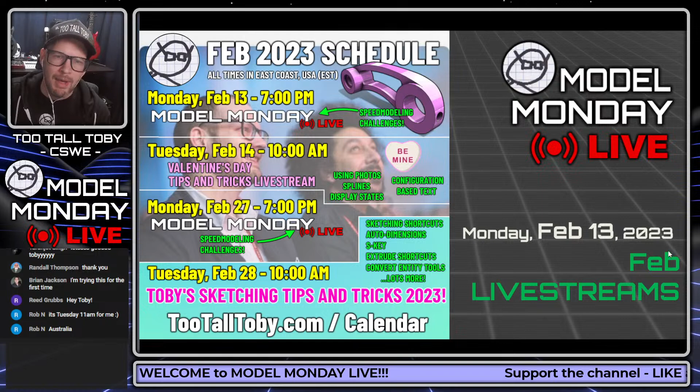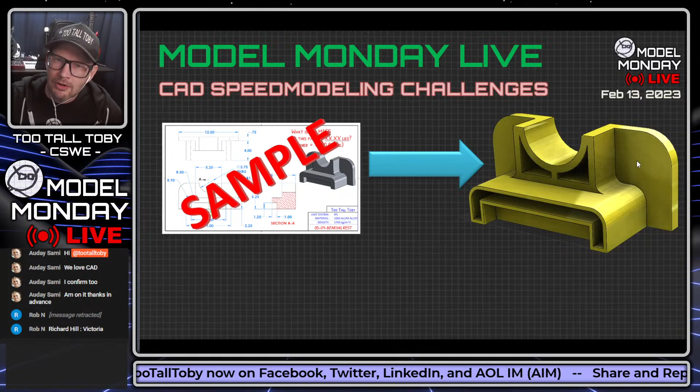I'm going to show you a 2D print. You're going to turn that into a 3D model, calculate the mass of that model, and enter that mass directly into the YouTube chat. The first person to enter the correct mass will win, but I'm not going to tell you the answer right away. I'll let everybody have a chance so everyone can compete against one another.

If you submit your answer and then realize it's wrong, that's okay. You can adjust and submit a second answer, a third answer, as many as you want during Model Monday Live. You can use any CAD package, but you need to be able to input the density.

I'll show you those material densities in just a moment, and of course output the mass. Make sure you use the specified precision, which is on the print. The first correct answer in the chat will be declared the winner.

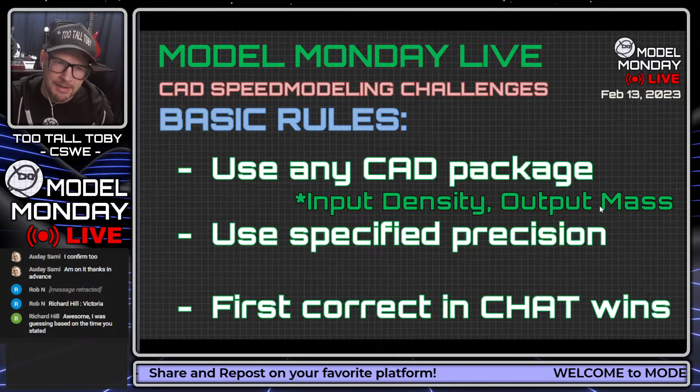Tonight, all the answers are in whole numbers, so you don't have to worry too much about the precision, that middle item there. But sometimes you do - sometimes I ask for it in 2 or 3 place precision, and that becomes more important.

These are the units that we use, so I'm just going to leave this up on the screen for a moment. Please take a screen capture of this so you understand what units you'll be working with. And really, I think what's more important than the units is the material density.

Take a look at the bottom there. If you're using a different CAD system than what I used when I created these things, your material density might be a little off. You want to make sure you're using the correct material density, otherwise your answer will also be incorrect.

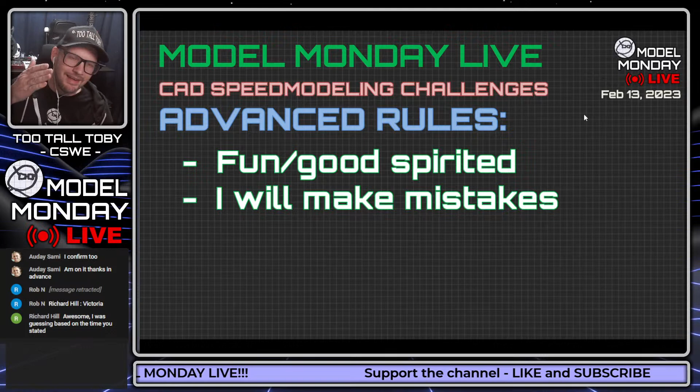The advanced rules are - this is meant to be fun and good-spirited. Occasionally I will make a mistake. I remember a couple weeks ago I left off a diameter on the print. I try not to do that, but occasionally it happens, and when it does we'll just adjust on the fly. The Ivan exploit is permitted - it's discouraged to a degree, but sometimes I make sheet metal parts and can't really get around it, so the Ivan exploit is permitted. Permitted, but discouraged, let's put it that way.

So what's going to happen now is I'm going to show you this 2D print full screen, and you are going to take a screen capture of this, Windows snipping tool, whatever. Once you take the screen capture, you can move that over onto your second monitor and begin modeling in CAD.

If you don't have a second monitor, once I show the 2D print you could just pause the video, like if you're watching from your phone. You can pause the video and keep working from your phone, or take a screen capture and maximize it. It's really best if you have a second monitor, but if you only have one, you can maybe tile your windows. After I show the print for a couple minutes, I'm going to move on and talk about some other stuff, so be sure to take a screen capture.

All right, this challenge is going to go live in 3, 2, 1, go. What is the mass of this part in grams, with a tolerance of plus or minus 1 gram? The material here is plain carbon steel, which has a density of 7,800 kilograms per cubic meter. The units are in millimeters.

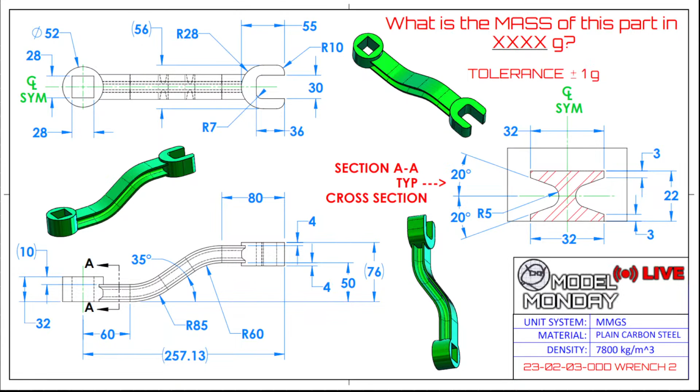It's a good song. Good song to get started with modeling, for sure. All righty, let's get back to it here.

So a question came in from Rob: what is the Ivan exploit? The Ivan exploit is basically, like on this print here, you can see this square, my mouse is pointing to it. Let me zoom in on it here. This square is on a face on top, and there's a face on the bottom. These two faces, the top and the bottom, are parallel to one another. In that situation, where the start face and the end face are parallel, the location of that square hole becomes irrelevant relative to the final mass of the component, meaning that square could be anywhere on that face.

Now, with this model, there's not really that much value in knowing that, because that square is centered on that lower face. Although now that I look at it, I realize I didn't actually call that out, that it's centered. I should have added a 14 dimension and a 14 dimension here. So there you go, there's an example of Toby missing a dimension. That does happen sometimes, I do miss a dimension from time to time. But that square is centered on there.

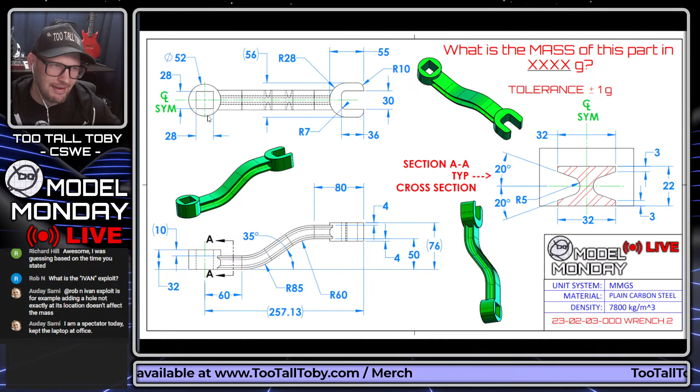Whoopsie! Very first one here for some of our runners. For Brian, sorry Brian, but that should be centered on that lower face. But hey, due to the Ivan exploit, it doesn't even matter if it is centered. So there you go, it all works out in the end. But that's the idea of the Ivan exploit. Sometimes that can be very valuable as far as time goes. But it's just something I can't really prevent, since I don't get a chance to see your models. Now, there are things I do when creating these models, like making the bottom face slightly angled, so the location of the hole does matter. Those are my efforts to thwart the Ivan exploit.

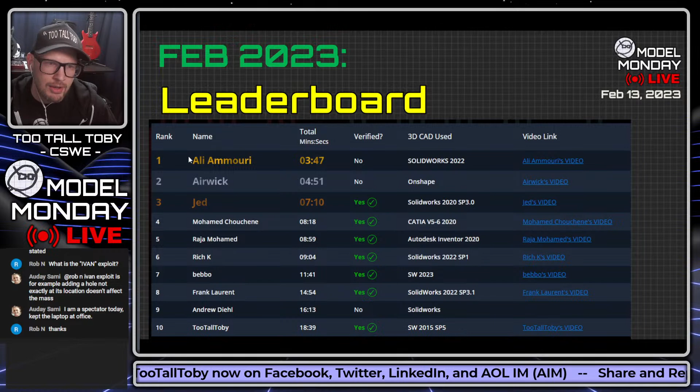So let's talk for a minute about the 2023 leaderboard. This is a really cool thing we started doing here in February. There is a leaderboard at TooTallToby.com/leaderboard, where I've posted 3 models, 3 drawings, like what we're looking at here. I challenge the audience to go through and create those three models, and the audience attempts to do so in the shortest amount of time possible.

Here's what the leaderboard looks like live. So this is the live leaderboard here. You can click on this little picture of me and get the rules explained to you, how to do it. You can click here if you want to see what the 3 drawings look like. And what's really cool is when you go down in here, you can actually click on the video and it takes you to the video of the person running this thing.

So looks like that one was... That Ali ended up having a problem with his first run there. He missed a dimension, and he actually still got the correct mass, but I noticed that he missed the dimension. But let's take a look at this run here. So this run, you can see this is by Airwick.

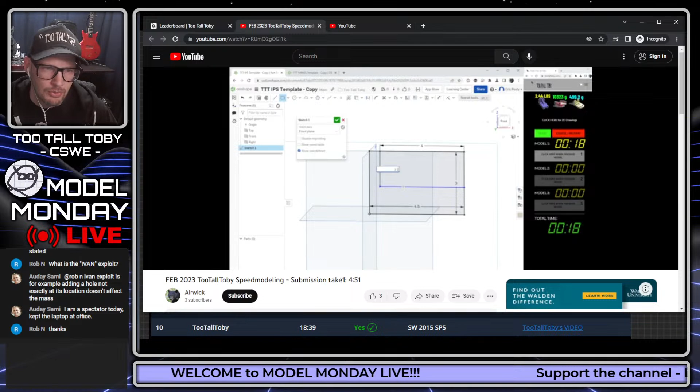So Airwick was using Onshape to perform this run, and you can see there's a clock on the right. You begin creating these models using the dimensions specified in the prints from the rules page, and your goal is to create all 3 models as quickly as possible. The cool thing is you can run them as many times as you want, practice, then hit record and try your speed run. As long as the geometry is correct, it's a valid speed run, I'll validate it and add your video to the leaderboard. So here, I fast forwarded to the end.

You can see Airwick coming down the final steps, adding in this counter bore, waking up the center point and putting in the correct geometry, then doing a mirror command and mirroring that body. He was able to calculate the correct mass, which allowed him to stop the clock, coming up with a total time of 4 minutes and 51 seconds.

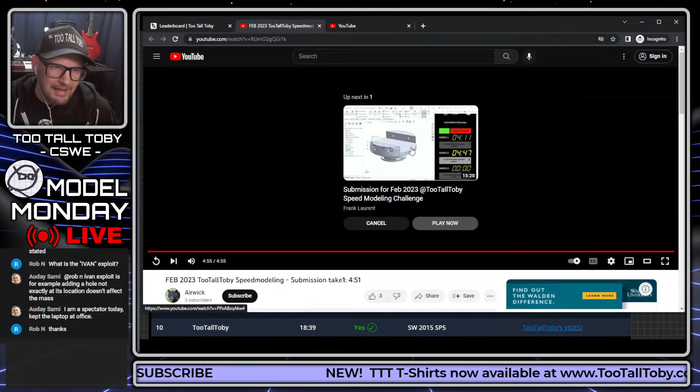And wow, look at this one. Frank's in here, I didn't even see that Frank had a video yet. I'm going to have to save this for later. Wait, is Frank on the leaderboard? Maybe he is. Oh yeah, he's on there. Right, cool, so Frank's on there too.

So yeah, it's all automated. The only thing I have to do at the end is watch your video, confirm that you did everything right, and then approve it.

I told Ali earlier today I couldn't qualify his video, I couldn't verify it because he missed that dimension. And he said, okay, I'll just do it faster - I'll do 3 models in 3 minutes and 44 seconds. So if you want to watch somebody totally screaming through that speed run, Ali also did one last month where he did 3 models in 3 minutes.

Very impressive. But it can take up to 50 people - we can take up to 50 people on this leaderboard. So even if you don't get shorter than 3 minutes, that's fine, you can still give it a try, and it's just cool to be on here. At the end of the month, I'm going to do a raffle where I'll give away a t-shirt to someone on the leaderboard, in any position - it doesn't have to be in the top 10 or anything like that.

So the leaderboard has been a lot of fun so far. I've really been enjoying watching people run it using different CAD systems, and getting to see how the different CAD systems work - I think that's really cool and a big part of what we do here on this channel.

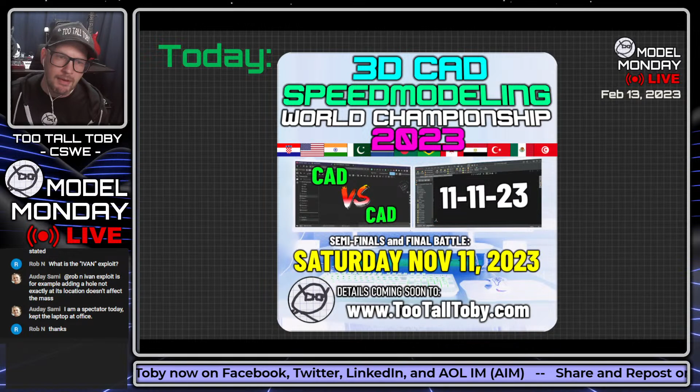On that same note, 11/11/23 is the date for our tournament, our CAD vs CAD tournament finals. November 11th we'll have the semifinals and finals the same day, with 32 people running that tournament. It's going to begin probably in August, maybe even July - we're still working out the final schedule, but we'll have all the dates posted soon. It'll be every Saturday once again at 10 a.m. East Coast USA, which seems to work out best for the global audience. We had, I think, 13 countries last year that submitted for this, and 6 different CAD systems, so it was really cool.

And in that battle, it's 1 versus 1 - are you faster than your opponent, and who makes it through to the end. Very, very fun format, and I'm looking forward to tournament season. As soon as it was over last year, I was like, I've got to get back into tournament season. So maybe we need to start having 2 tournament seasons every year - I don't know, maybe that'll be 2024.

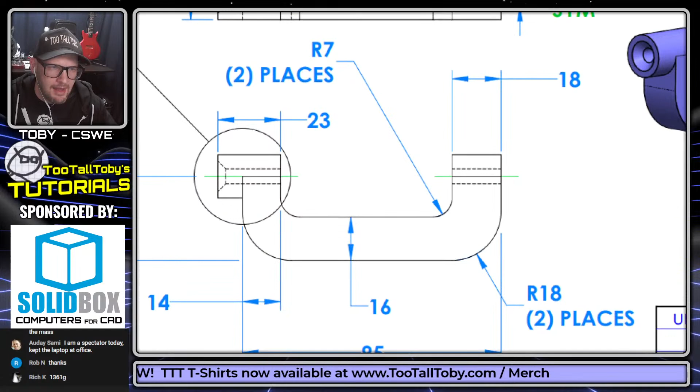For this model, I would ignore the section sticking out on the end and focus on this shape with the rounds. Then I'd take it one step further and ignore the rounds up top, imagining them as sharp instead. That leaves me with the idea of drawing this shape as the start of my model, which tells me my starting plane will be the front plane, and my starting sketch will look like this U shape.

Once I have that first shape sketched with sharp corners, I can add the fillet, either as a full round fillet or as two half-round fillets at half the wall thickness. Then, with that shape in place, I can easily create the additional extrusion for this circle, and finish up with either a cut extrude or a hole wizard hole, creating this countersink that runs through the entire model.

So that's going to be my game plan going into this thing, and it's very important, regardless of what CAD system you're using, that that's where you begin. You begin by just thinking through how you are going to build this thing — what is your game plan.

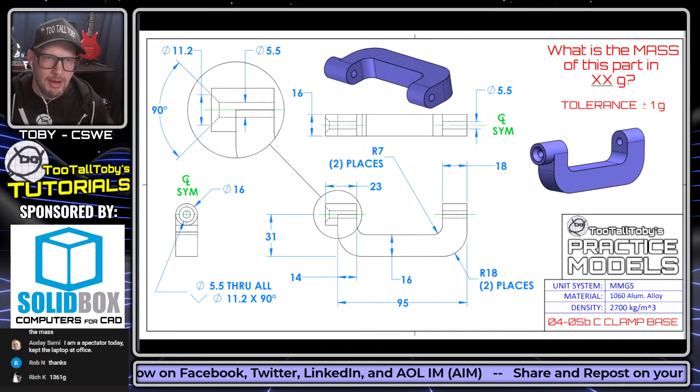So now that I've got that game plan in mind, let me move this over to my second monitor, and we will attempt to create this model here in SolidWorks.

So here I am in SolidWorks. Let me just make this a little bit smaller here, to make this a little easier for everybody to see.

All right, so we're going to click New, and once you click New, we're going to choose a template. Now your new screen might look like this, or it might even look like this. What I always advise everybody to do is click on the advanced button when you get to this screen for your templates, and at least choose a template from here.

We'll talk more about templates sometime in the future, but you want to get in the habit of making sure you're working with the correct units. Those units are found under Options, then Document Properties. So you go Options, Document Properties. Really, everything on this tab here, Document Properties, is stored in your template.

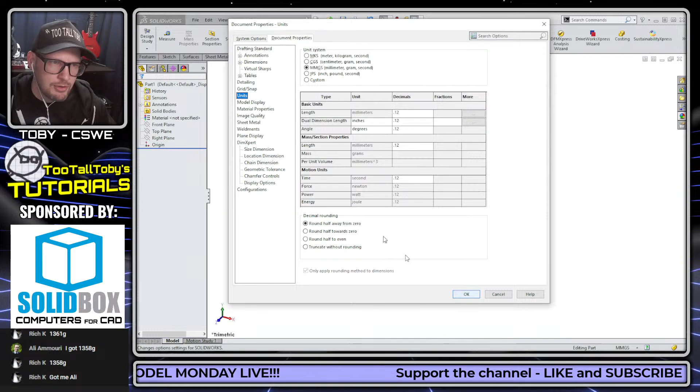So if you find that over and over again you have to go in and change your units — like you want to be working in millimeters but every time you're working in inches and have to keep changing it — you need to change that option and then do File, Save As Template, and make a new template. But again, we'll talk about that more in the future. For now, let's just make sure we're working with the correct units from the drawing, which is millimeters.

Then we're going to go to the front plane, begin a sketch, orient our view, and begin creating that shape we described a moment ago. We could create that shape by starting up top here and coming down with a line, doing a single click, then moving away from that line and coming back to touch it, which takes you into an arc command.

Now, I know I'm using SolidWorks here, but there are other CAD systems with similar functionality, and you definitely want to learn if your software has something like this — a line-arc-line functionality, or auto-transition to tangent arc functionality.

This can really make your life a lot easier and make your model creation a lot faster if your software has this functionality and if you learn how to use it - the line arc line functionality, there we go.

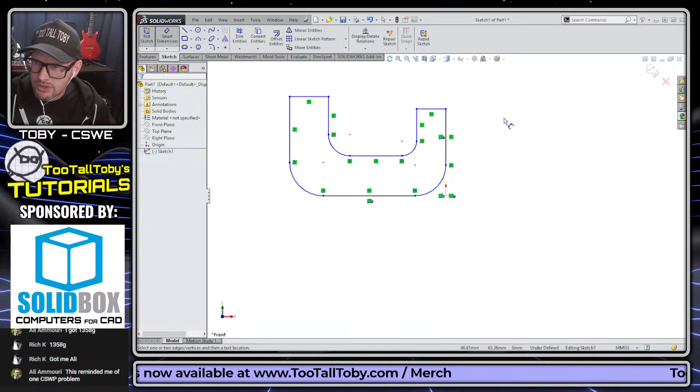You'll notice that I decided to drop the origin here at this lower corner. In the case of this model, it doesn't really matter that much. The model is going to be centered, but it doesn't matter exactly where I put the origin. There are a few different options as to how to create that model and where that origin should be, but frankly, in this model, it's not really that important.

So I'm going to go through and add in my radii. Now, having your radii in the original sketch versus having them created later as features is another debate that people get into in the world of CAD. In this case, I'm just doing things very fundamentally, getting you to follow fundamentals. But you may come to a point where you decide this is way too many sketch relationships - tangent, tangent, tangent, tangent, tangent. I don't want all these extra sketch relationships. So I'll just make my first sketch sharp, and then I'll add those fillets at the feature level, and that certainly is a valid strategy.

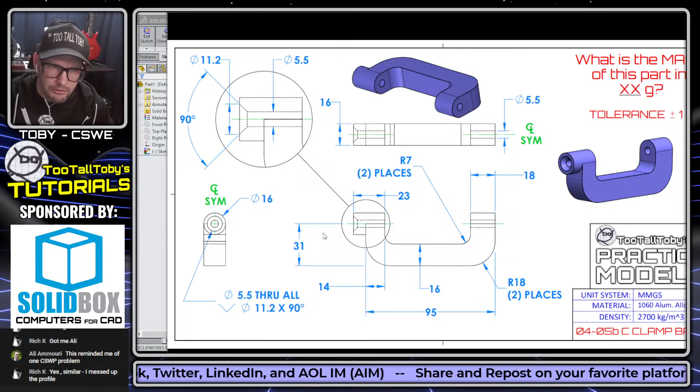Now, at this point, we're going to run into a little bit of an issue because we don't have a dimension for the height of this stuff here. The only thing we really have is this 31 that's coming up to this location. So maybe we want to do a little bit of math - this thing is 16 wide, and it's a full round going across the top here. So we can figure that it's 31 plus 8 to give us that radius.

Sometimes what I'll do in this situation is actually sketch a center line. So I'll create a center line like this, then create my 31 down here, then create my dimension from the center line to that top line, and put that in at 8. So that's certainly an option as well, one that I've used a lot, just to make things a little bit more consistent with the drawing that I get from the customer.

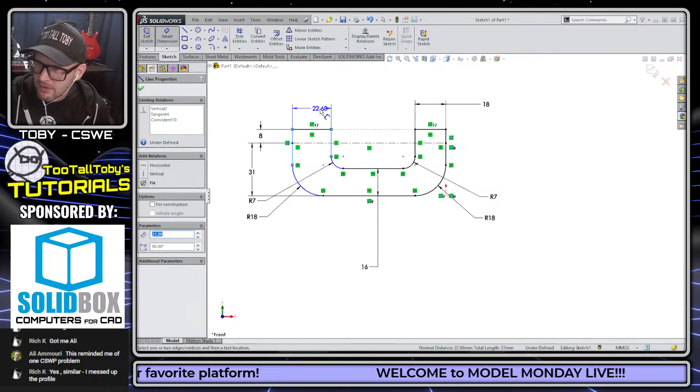Now I'm going to type in my final dimensions here. Some of these dimensions I'm just going through and not necessarily explaining. I think they're pretty straightforward, but if they're not, let me know in the chat, or of course you could let me know in the comments if you're watching the recording of this.

What we're hoping for is that our sketch becomes fully defined, meaning everything is black. And if it's ever not fully defined, the best trick I can tell you is just grab one of the blue endpoints or the endpoint of the blue entity, and drag it around a little bit. Then use your engineering intuition or geometric intuition, and you can say, hey, it looks like maybe that line and arc are not tangent to one another, and you can add in that relationship.

So now we're going to go to the extrude command. For me, I'm going to use what's called the S key on my keyboard - it's one of my favorite features in SolidWorks. But we could also exit the sketch and then go up to features, our features toolbar up here. So after I exited the sketch, I was able to go to my features toolbar and choose extrude. Now here I'm going to say I want to extrude that out to a depth of 16.

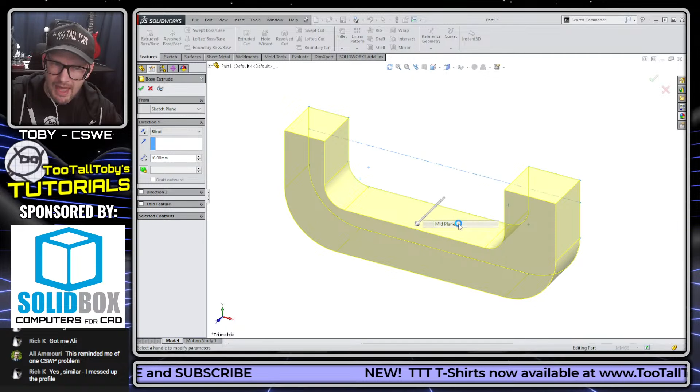A lot of times what I do is right mouse button in the background and change the end condition to mid plane. I think that's a really handy shortcut, because as soon as I do that, I can then once again right mouse button, and when I do, you can see that finishes out that command. So that's kind of nice - it saves you some mouse travel.

Now I'm going to press the S key again, and this is pretty much what the S key looks like when you're in feature mode. It looks a little different when you're in sketch mode, but the main thing you want to recognize is that the fillet command is right there on the S key menu. So I just press S on my keyboard, and I jump right into the fillet command. I can say I want this to be a radius of 8, and I can say I want to pick this edge and this edge and this edge and this edge.

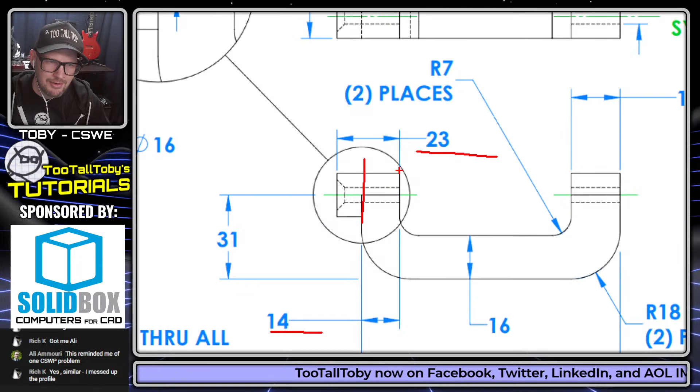And wow, that's setting me up pretty nicely. I'm getting pretty close to the end of this thing. Now the next feature I'm going to create is just going to be a circle, but I'm going to sketch it here and then extrude it out. The reason I'm planning that out ahead of time is because the drawing is giving me this 23 dimension. You might instinctively sketch the thing here, but then you'd have to do 23 minus 14, and maybe I can't do that math in my head. So instead I'm just going to draw the circle over here on this end, so I can extrude it right out to the dimension on the drawing. That's another good tip, especially if you're just getting started in CAD.

Think about where you're creating your original sketches. A lot of CAD programs will have tools that automatically wake up the center point, that's what I'm doing here, and maybe even automatically hook to an existing endpoint or edge, which is what I'm doing over here.

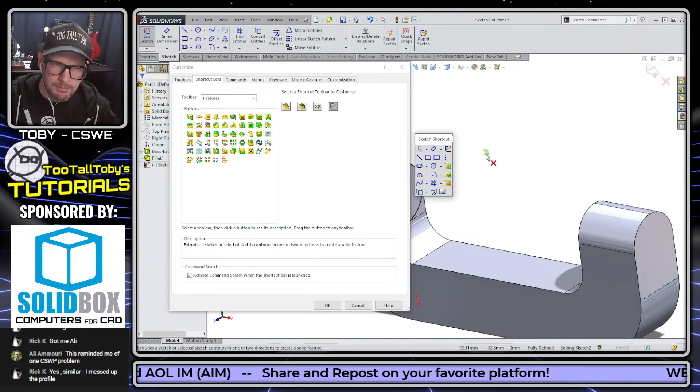Now I can jump into the extrude command, and I did that by pressing the S key. If you press S and you don't have the extrude command, you can right mouse button customize, go down to the section for features, and drag and drop the extrude command right onto your S key menu. That way, when you're in sketch mode and press S, you don't have to exit the sketch—you can jump right into extrude.

That's going to go out to a depth of 23. Then I'm going to right mouse button in the background and say reverse direction. A lot of these commands over here, like the end condition of midplane or reverse direction, are also right here in your right click menu, and I think a lot of times it's a shortcut just to get it right from there. So reverse direction, and then I'll right click one more time.

And then finally I'll finish up here with a hole wizard hole. These dimensions called out in the hole callout: 5.5 millimeter through-all hole. So this hole here is 5.5, 11.2 with a 90-degree angle on the C-sink. So that's this hole here, 11.2.

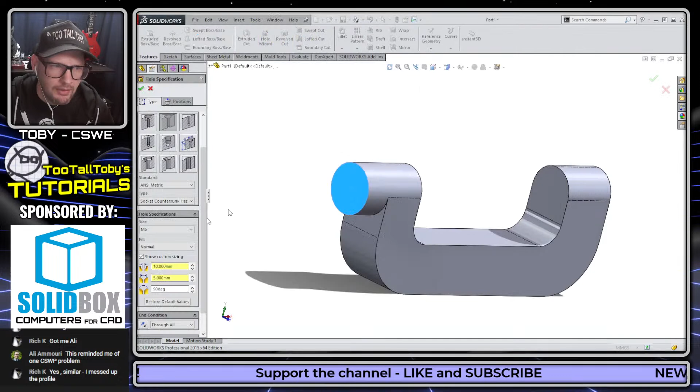A lot of times the hole callouts, which are standardized per the machinist handbook, will also be standardized in your CAD software, even if it's not SolidWorks like I'm using here. Even with a different CAD software, a lot of times you'll find that the magical hole tool you have will have a similar order of callout information—like this one here, it's got the through hole, the countersink diameter, and the angle of the countersink.

So just like what we have on our print: 5.5, I'll press tab, 11.2, I'll press tab, and now all I have to do is go to position and drop that thing right on the center, right mouse button, and boom, I'm done with that as well.

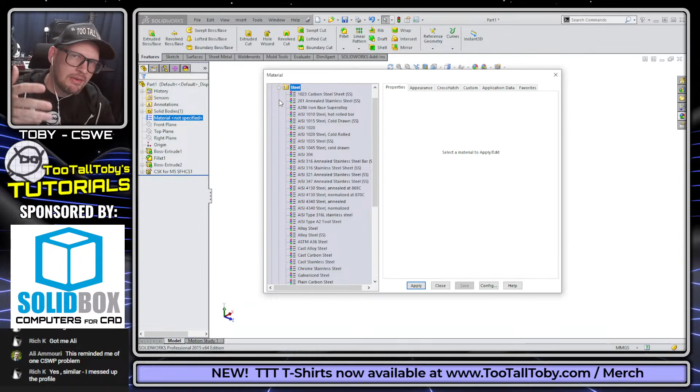To finish this off, I'm going to right mouse button over here on my material and get into my material library. If I find that at my company I'm using the same materials over and over, I'll make sure to add those materials to my favorites, so I can just right mouse button over here and pick it right from the list of favorites. In this case, this print is calling out 1060 aluminum alloy. So there we go, I've added that 1060 aluminum alloy.

Then I'll finish up by going into my evaluation tool to find out the total mass of this thing. 91.99—I'm going to round that up to 92 grams. That's going to be my final answer. Now let's come over here to the 2D print and see if we got it correct. The live solve answer is... yes, we did it.

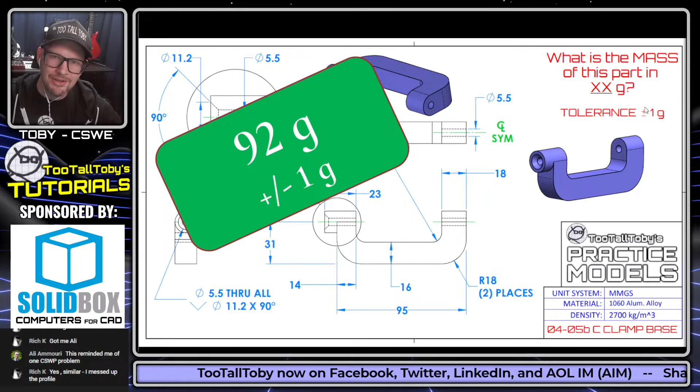Let's do one more. We'll do the angle bracket. I'm going to go through this one a little quicker. That first one was more for beginners, so this one I'll go through a bit faster. But it's going to be the same process. Let's do a live solve here of the angle bracket.

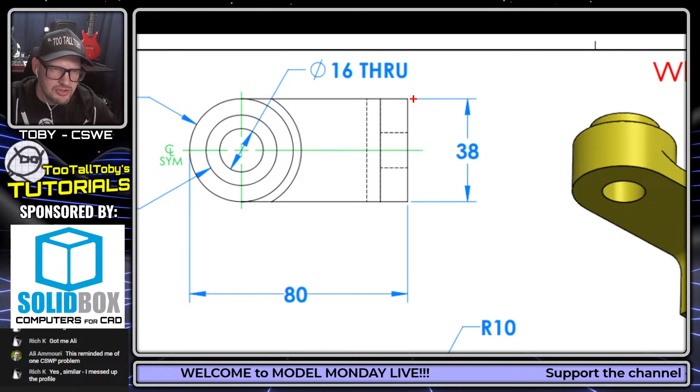The other approach you could take might be to draw this shape looking down from the top, on the top plane, creating this shape, and then extruding it to the wall thickness specified here of 7 millimeters. I think that's a great plan as well. So either plan is good for our starting plane, our starting profile.

I like both of them, but I think I'm going to use the latter, where I draw the top-down footprint. If you're ever not sure where to begin, a lot of times just picking the top-down footprint is a good solution.

The other thing we want to do with this model is recognize where the origin should be. In a model like this, it's either going to be right here at the center of these holes, or back here at this location. Either one is a good location, but they both jump out at me just because there's a lot of dimensional information coming from this location.

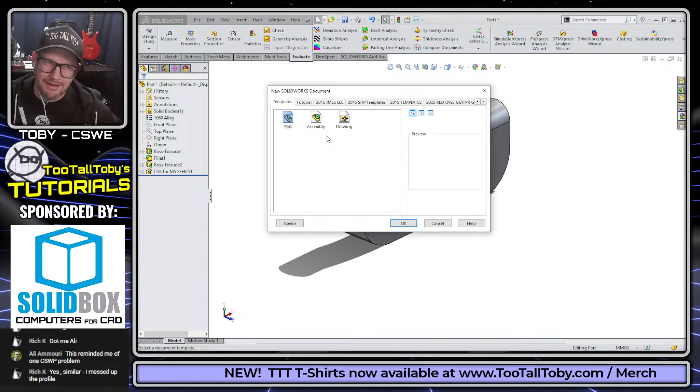So let's start a new part here, and once we start the new part, we want to make sure we're working with the correct units. Remember that down here in the status bar, there's a shortcut to pick your units. So if you ever find your part is working with incorrect units, you can use that shortcut. That's a great time saver as well.

Top plane, begin a sketch, orient the view. I'm going to press the S key and jump into the line command, and create a line here that has a length of 38 using the auto dimension functionality. If your software has auto dimension functionality, that can be another really good time saver. Most software does have something similar, so it's definitely worth learning how to use it.

I'm going to pick this point here, which is the origin. I'm going to hold control, pick this line, then let go of control and make that midpoint. That gives me the tombstone centered on the origin.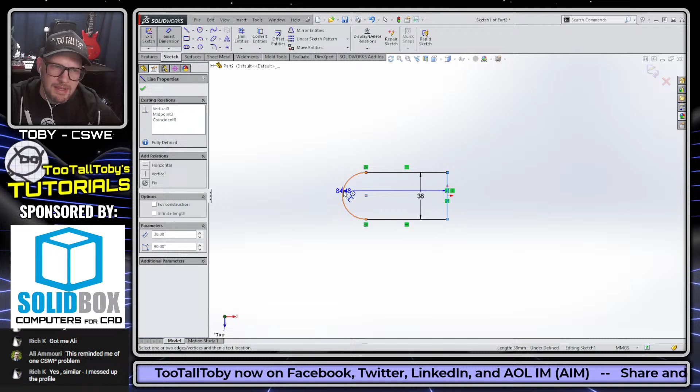Then I'm going to go into Smart Dimension. I use the S key to launch Smart Dimension, and then I'm holding Shift. So I'm doing a couple of things here with my left hand: pressing S to start Smart Dimension, picking this line, holding Shift, then picking the arc. That way I can pick right at the tangency point of the arc instead of the dimension going to the center of the arc.

I'm going to give that a value of 80 and then extrude. S key extrude, and extrude that up to a height of 7. Enter, enter. Now I'm ready to create the revolved shape.

I could create this kind of revolved shape that's sticking up through the top. I could do that as 2 extrusions, or as a revolve. I'm going to do it as a revolve. So front plane, begin a sketch, orient the view, sketch a center line for my revolve.

Jump into the line command, again using the S key. Bring a line over here, all the way out to that point. Come up to a height of 7. Come over, come down here. This is going to go down to a height of 19, and then come all the way down to the bottom. That height of 19 is going to lock right into this edge here.

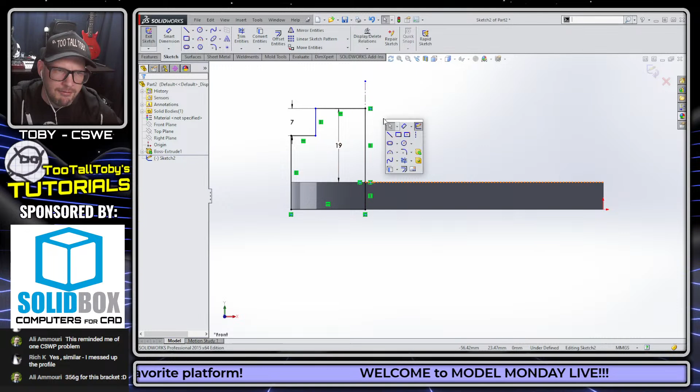Finally, I need to specify a diameter of 26 for this location here. And then features, revolve. And there we go, that gives us that kind of upper revolved region.

I'm going to go to this face here, begin a sketch, orient my view, and sketch a rectangle. This rectangle is going to have the auto dimensions at 30 by 10. Then I'm going to S key extrude that rectangle, picking this point so that extrusion goes right up to that point, then right mouse button to finish.

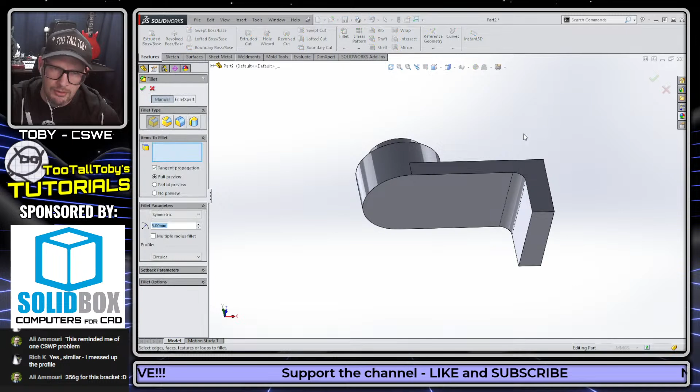So these are some good little shortcuts for this example. Maybe just a little preview, but definitely worth looking into. Here I'm using S key, jumping into the fillet command and typing in the appropriate radii for these fillets.

Coming over here to this edge of the part, begin a sketch, orient my view, and create a tombstone shape. Begin a line that comes up here like so, come around here, this is going to have a radius of 13/2, and then I'll close off that tombstone shape.

This is going to be vertically centered from the origin, so I pick the origin, hold control, pick this point and make them vertical. Then there's one final dimension, hold shift here to get the top of that tombstone, and that's going to be at 17 millimeters.

We'll extrude cut that, right mouse button, through all, right mouse button. Then we'll finish up top here with a 16 millimeter through hole.

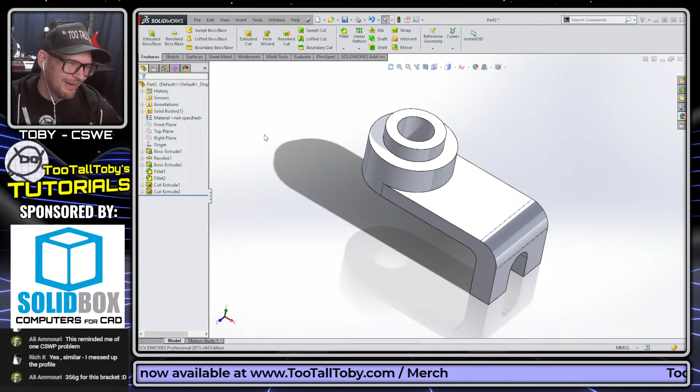Select a face, begin a sketch, orient the view, S key. We're going to this diameter of 16, S key, extrude cut, right mouse button, through all, right mouse button. That time I missed the right mouse button on the end, so I just went into the menu and picked OK.

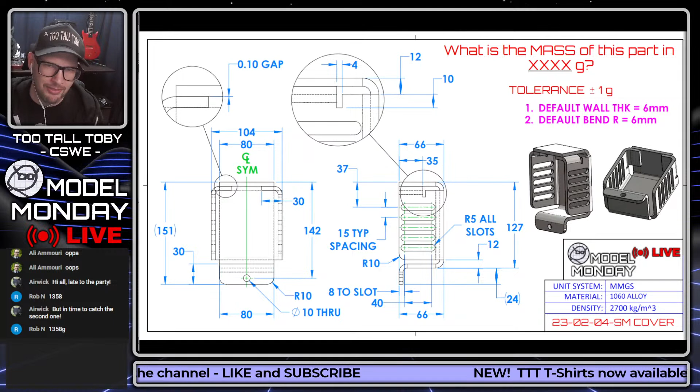What is the mass of this part in grams? This is a 6 millimeter thick sheet metal part, getting a little on the thicker side. The default bend radius for this is 6 millimeters, so the inside bend radius all around this model is 6 millimeters, and the wall thickness all around this model is 6 millimeters. This part is MMGS. The material is 1060 alloy. I know that it's not common that you would bend aluminum like this.

I made the first part out of plain carbon, and I didn't want to give you guys two models that are made out of the same material. So I made this one out of a different material, but I know there's going to be some sheet metal people out there that are like, you would never do that. So I know, I got it.

This model, you can see in the upper left, the tabs that bend up almost touch - there's a 0.1 millimeter gap. So those tabs almost touch that top surface of the model. So what is the mass of this part? Whoops, I forgot to go to full screen. There you go, there's a full screen version, sorry about that guys, maybe that'll be a little easier to copy.

And here we go, all day, coming in the chat - I knew somebody was going to come after me. He says, 6 millimeter aluminum will crack on those bends. Yes, I knew it, I knew something was going to happen, somebody was going to call me out. Yeah, I had a feeling when I was making this drawing, I said to myself, you know what, this probably is really not the appropriate material, but I didn't want to give the crew two models with the same material, and I had already finished the drawing and everything and output it and loaded it up in the PowerPoint.

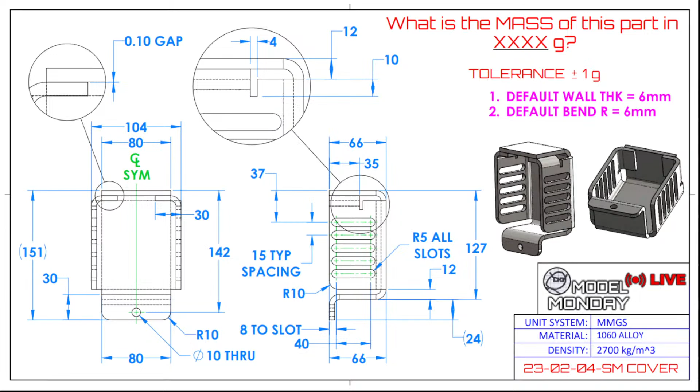It's a little tricky for me to make these sheet metal challenges because different CAD systems solve things a little differently. So I made sure the second detail is more centered on the print, clearly calling out what the gap needs to be, the relief gap. A lot of times your CAD software will automate that process, but I made it explicit so you can see exactly what that relief gap needs to be. That should be enough information for everybody to create this thing. So good luck, and the show goes on.

Man, I'm so enjoying this time slot. Gotta say, thank you guys. Thank you. Oh yeah, we do have the same shirt, that's awesome man. It's great watching 3D CAD live streams with your kids, nothing more exciting.

So just some stuff that's going on in my world right now. I want to remind you guys, last month we did a 17-part live stream on how to build a bass guitar, start to finish. There's actually an even better model that has all the strings and everything on it, but we got start to finish, we did the whole thing. It really came out good, I'm very happy with how this thing came out, and I encourage you to check that out.

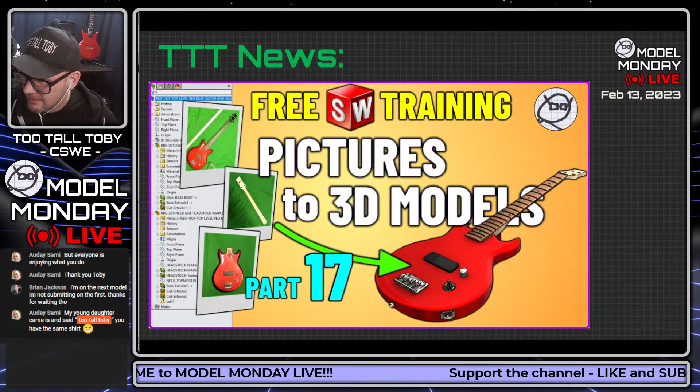We did everything with this. Let me see if I can queue up another picture of this thing without doxing myself, hopefully. So we did some really good work on this thing, I'm really happy with how this came out. We did all the electronics on the inside, which look very cool, all the electronics there on the inside.

We did a tuner that actually spins, that has all the appropriate gear mates in it. Here's a picture of that tuner with all the gear mates in it. That came out great. And we did, like I said before, the strings, we got all the strings in there. Where's the one that I made with the strings? It's gone, oh well, must have that in a different directory for some reason, it's weird. Oh, here it is. Boom, look at that, look at that bad boy.

So yeah, we did it, and we did it across 17 different live streams, and it's basically like 30 hours of free training. If you ever wanted to know how to build a guitar or a bass guitar, the main things that catch people are like, what do you do about the contouring around the body? How do you blend the neck into the neck cavity pocket? And how do you blend the neck into the headstock up top? Those are like the three big things. And then maybe, how do you do the strings? That's probably the fourth thing that everybody always wants to know about. So be sure to check that out.

It is a wonderful series of free training for anybody who's in the world of SolidWorks. If you're using different CAD, that's probably a lot to ask to sit through 30 hours of training on a different CAD system, but who knows, maybe you'll be able to extract something from there.

All right, let's do one more live solve while you guys are working through that challenge.

Taranjot comes in with his answer for the first one. Very nicely done, I like it. You got to keep going, man - never stop, never give up. I like it, nicely done.

All right, let's do one more live solve here. I think this will be good - this one's going to be a good model, I think. So welcome to our live solve here. This is for one of the practice models that I posted a couple of weeks ago. This one is the egg cover cap, and it's a really cool drawing that we put up here. It's got a lot of interesting stuff happening.

One of those things is this extra dimension that really shouldn't be here. That was from when I made a mistake the other time, whenever it was. Let me get that diameter off of there. All right, here we go, start again, take two.

So welcome to this SolidWorks tutorial, this live solve of the egg cover cap. This was a drawing that I posted a couple of weeks ago, and I wanted to go through now and show you guys kind of how a certified SolidWorks expert might think through this challenge. There's a lot of information on this drawing, and it can be a little intimidating, I know.

But I think the main thing you want to recognize here is that this is a model that is being revolved. The way we can tell this is being revolved is primarily from the centerline symmetry here, and the centerline symmetry down here, which I know are the same centerline symmetries, and this arc here that's running through the bottom. So we know that all this information is coming from the same centerline section of the model, and that helps us understand how this thing has to be revolved.

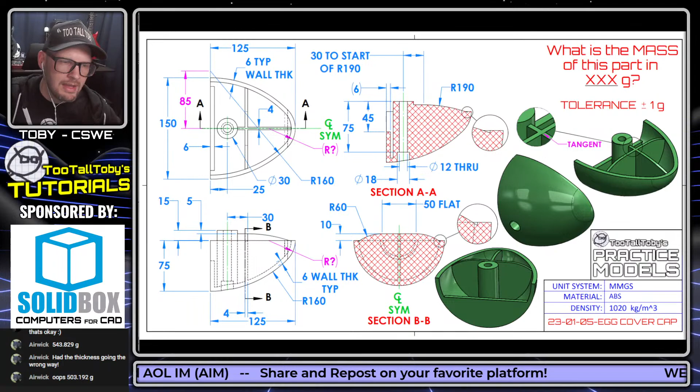It really sets us up to understand that the first profile in this model is going to be probably this profile here. We've got this radius 160 coming up, and then there's this smaller radius that we don't really know what it is, but we do know that it exists right here, right at this point. That's definitely going to help us understand that this thing needs to be revolved.

So what we need to do now is attempt to work through this model based on understanding that this is our first profile. So let's get into our CAD system. In this case I'm using SOLIDWORKS to go through this, but if you're using a different CAD system, I think you can still take away some pointers from this process.

We're going to start a new part. We're going to take a look at the title block. The title block says the units are MMGS, so we want to make sure we change our units. You can do that down at the bottom in SOLIDWORKS, or you might have to go into your options and change your units to millimeters. And the material here is ABS, so I'm going to pick that from my materials favorites, saving some time by having that material preloaded in my favorites so I can just pick it right from that menu.

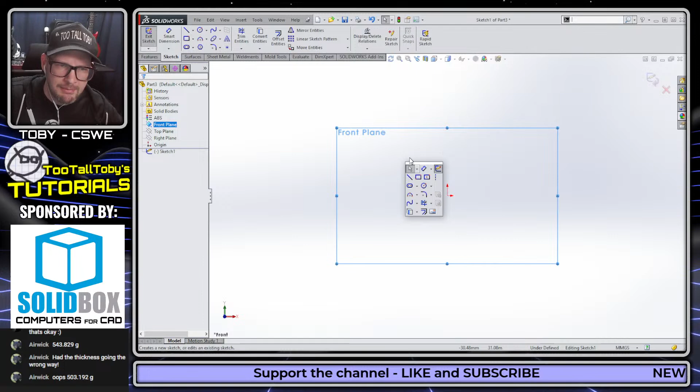I'm going to go to the front plane, begin a sketch, and create the basic geometry for this revolved shape. That basic geometry is going to be maybe a horizontal line here, and then I'll come back and touch the end point of that horizontal line. Instead of coming off with an arc tangent like so, I'm going to come off with an arc tangent down in this direction. I don't know what that radius is, so I'm just going to drop that arc like so.

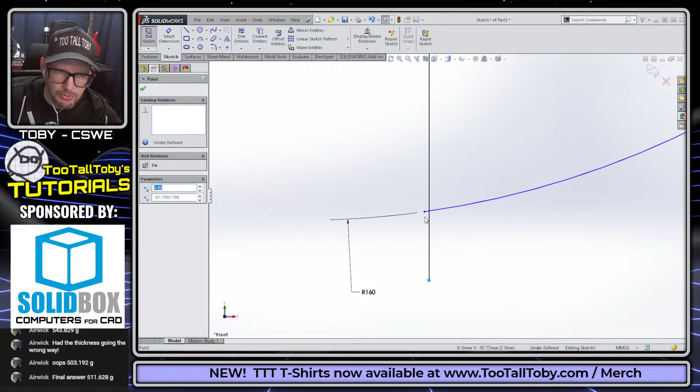And then I'm going to create another arc here that comes down like this with a radius of 160. So there we go, that gives us that radius of 160. Then I'm going to create a vertical line here. We could hook those points together just by picking this point, hold control, pick this point, let go of control, and use the merge points command. You could also trim those lines. Either one might be a good solution, but I'm just going to merge those points together.

And then I am going to take a look at this view here. This is where things get a little tricky, kind of have to infer what's going on. But I notice in this view I've got this radius 160, and I've got this 85 coming off from the center. We kind of have to assume that's the same radius all the way through, that this radius is just a continuous arc all the way through. You can infer that essentially from this view not having tangent edges on it - you can infer it's one smooth radius all the way through.

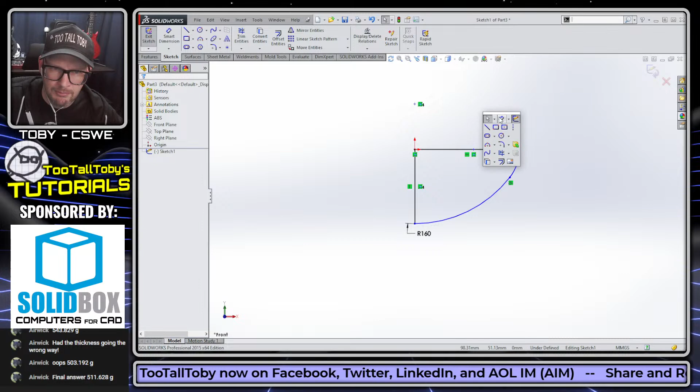Based on that information, I know where this radius 160 needs to be in my revolved view. In other words, this profile I'm creating is going to be the same whether I'm looking at it from the front or the side. That means I can take that 85 and apply it here looking at this from the front as well. Now the only dimension I really need, in lieu of that radius, is the overall length of this part. I can see from the one view that that overall length is 125, so I make that 125. That gives me a nice black sketch, nice and fully defined. That's what your first sketch should look like for this egg cover cap model.

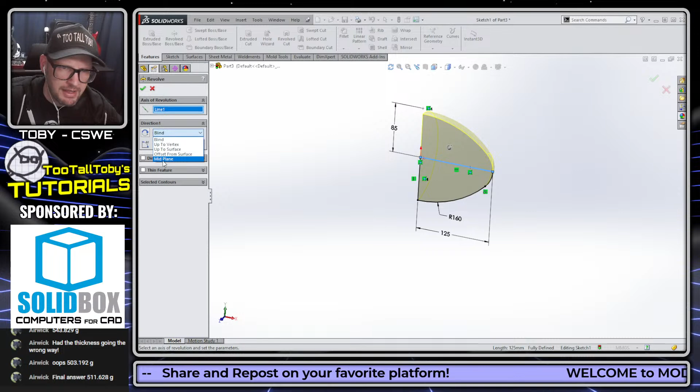So we can then take that geometry and say features, revolve. We can pick this line here for our axis of revolution. We can say we want that to be 180, and we want that to be mid-plane. And there we go, that looks pretty good - pretty good start to this thing.

Next thing we need to do is hollow this thing out so we can start creating the interior geometry, and we're going to do this with a shell. Now when we go to shell this geometry, it's probably tempting to leave this face here as part of the shell, but really I think you want to get rid of both of them. The reason is because this face doesn't really go all the way down to the bottom, and it's going to be really tricky to cut just the top part there and maintain this wall thickness, the integrity of this wall, which would be up in this region. That's going to be really tricky to cut if we've got that wall going all the way up and around. So instead of giving yourself that additional challenge, just get rid of that wall as well.

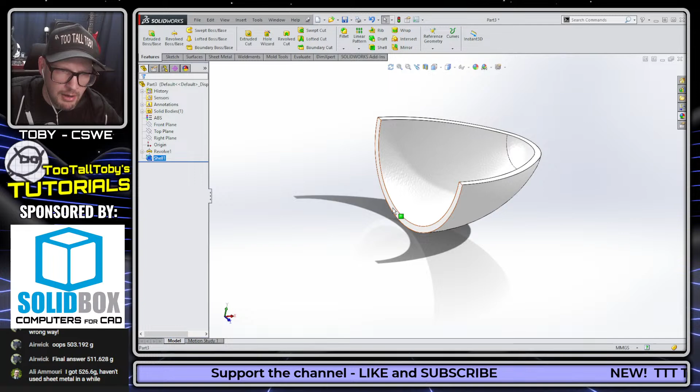So when we go into the shell command here, the typical wall thickness is 6. Let's just get rid of both of these walls with a wall thickness of 6. Then we could go back in, pick this face, select face, begin to sketch, orient our view, and maybe take this edge here and do a convert entities, then just sketch a line that comes across the top like so, and trim both of those. So just do a quick trim command here to trim those off.

And then we could put in that dimension, which in this case is actually coming from a weird spot - it's coming from that boss that's sticking up, and that boss is sticking up 15, and then this is coming down 45, so it's really 30 from the top here. I might go back in at the end and redefine that so it actually matches the design intent from the customer, but I'm going to leave it like that for now.

Okay, that's good. I'm happy with that. Probably the next thing that I would do would be to create the circular boss that's sticking up out of the top of this thing.

So I can see that that is going to be sketched on a plane that is 15 millimeters up, or at least the extrusion is going to end 15 millimeters up. I think probably the easiest way to do that is just to make a new plane.

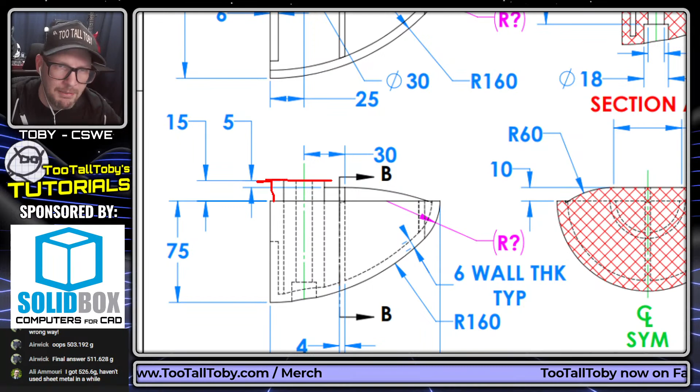So I'm going to pick this face here, and once I pick that face, I'm going to go into my reference geometry command, reference geometry plane. A lot of times I get to that by just pressing the S key. So this is the out-of-the-box SolidWorks S key menu, reference geometry plane.

And then I'll type in 15, enter, enter. So learning how those workflows go, enter, enter, on certain commands can save you a lot of time too. If you're already over there on the 10 key, you may as well just start typing.

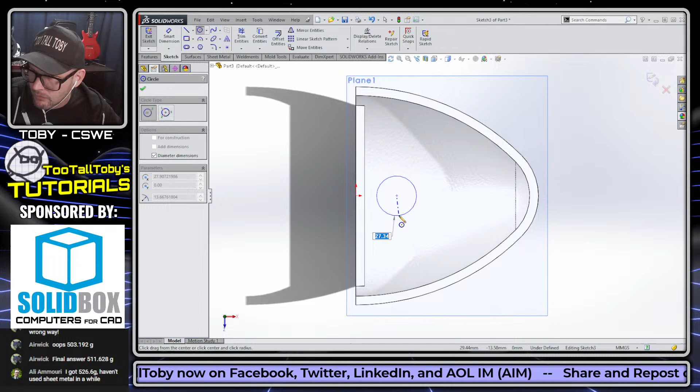All right, so this is going to be at a radius, or a diameter, of 30. It's going to be horizontal to the origin here because it's on centerline symmetry, and then it's going to be at a distance from this edge of the model of 25 millimeters.

And since that's already up there, I can S key extrude, so S key, and then I can just press extrude. Remember, if you're working in the S key and you don't have the extrude command, you can go into features, customize features, and add the extrude command right there into your S key when you're in sketch mode. Anytime there's a command you want that's not there, you press S on your keyboard, right mouse button, choose customize, and add whatever you like there.

So S key extrude, and then I'm going to double click this face down here, because when you're in SolidWorks and you double click a face, that's the shortcut for up to surface. And then I'm going to right mouse button. So in real time, if I do a Control Z here, what you can do is S key extrude, double click, right click. Boom. Move on with your design. Nice and speedy.

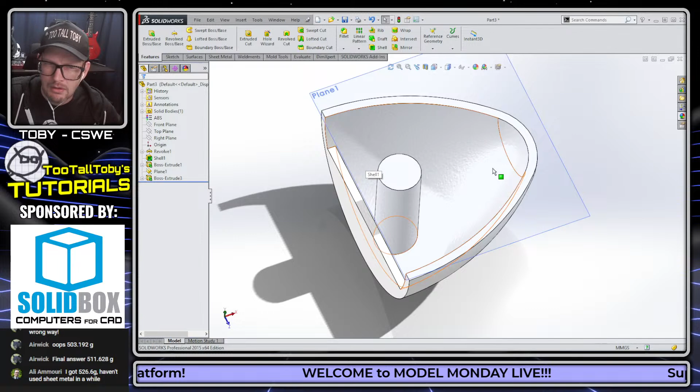Now, I mentioned before that I might take this boss extrude, this wall here, and redefine it correctly. So the way I would do that is I would drag this down in the tree, drag it below that plane, drag it down a little further.

Let's see, it doesn't like that. Why doesn't it like that? Let's go. Edit this sketch here and see if we can't figure out why it doesn't like that.

Is it because of that convert entities? Interesting, let me delete that. Oh, that's interesting. It almost considered that other boss part of that feature. That's really wild, I don't know why it would think that.

I didn't... oh, of course. That dimension from the end of the model came from there. Yeah, okay, so it was this 25 dimension here that came from that edge.

So let me just define that to the origin so I don't get a feature creation error. There we go. Nice job, Richard.

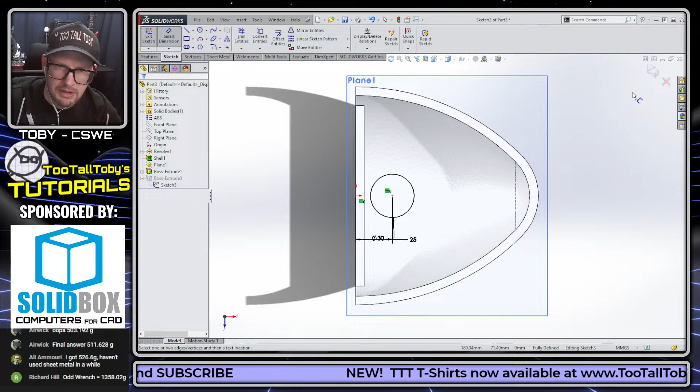Odd wrench coming in with the odd wrench. I like it. Ali coming in with the sheet metal one as well. Very nice.

All right, so now I can drag this feature down below. And then the cool thing in SolidWorks, and I think there's probably a lot of other CAD packages that do this too, when you want to reassign a dimension, a lot of times you can click on the dimension and then grab the grip and just drag the grip up to the new geometry.

So if I just drag that grip up, let's see, can I assign it to here? All right, let me hide this plane.

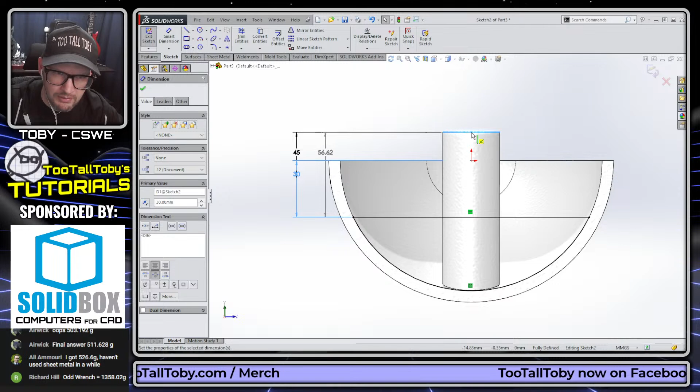Let's see if I can drag it onto this edge here. Nah, it doesn't want to let me do it because it wants it to be to a point. Bet that's why. Oh, there we go. Okay, got it. So now that's going 45, and that's the dimension that's on the print itself. So it's always good to know that you can just drag and drop to reorient that stuff right onto the print itself.

So now let's keep moving on with this design. The next thing we're going to create is the rib that's defined in this view here. You can see this rib is coming over. It's starting out 5 millimeters down, from that circular boss down to here. It comes over 30 millimeters, kind of straight. Yeah, 30 millimeters to the start of the rib, or the start of the 190. So it comes over 30, and then it just angles down with that radius 190.

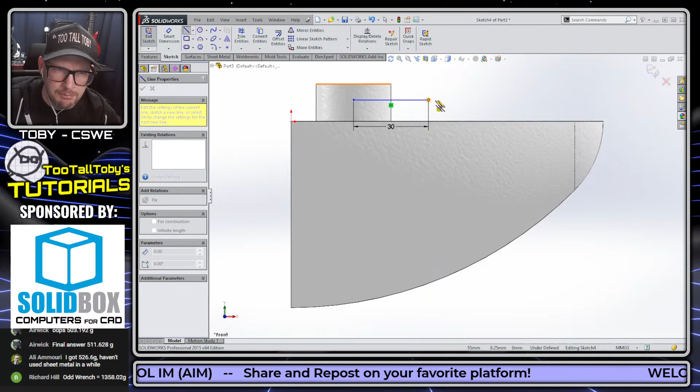So in this situation, what we could do is go to the front plane, begin a sketch, orient our view, and create our geometry that comes over here. Actually, right from the center of this thing would probably make the most sense. So right from here, come over 30, enter, come back, touch the endpoint, and then come off with a radius of 190, enter, and just bring that all the way over like so.

Now the only thing we have to define really is the distance to that rib, and maybe we could do a view temporary axes and then hook this onto that temporary axis. So there we go, nice fully defined sketch. Now it's true we could define this more as well, but the reason I'm leaving this in the material like so is because I'm going to end up using a rib command.

Now I'm just curious here. Let's see what happens if we leave this out like so and we go features, rib, and say this rib is going to have a wall thickness of 4, and then hit the green check mark. Yeah, see, this is what I was expecting. It starts out as an arc, and then it becomes just a straight flat rib for the extension of that arc. So I wonder if there's an option in the rib to control that.

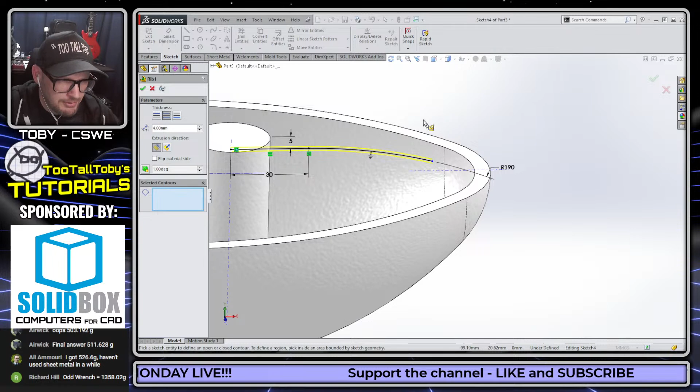Yeah, see, there's not an option in the rib to control it. I know that when you do something like a surface extrude command, you have more control over that. But in this case, we don't really have that option. So we need to make sure that when we create that rib sketch, we're extending it as far as possible. Ideally, we'd want to pick up some kind of a relationship here.

So maybe what we could do is draw a center line that comes down and merges to this point, a vertical center line. Then we could take this point, hold control, and pick this arc here and make that pierce. That should give us a result that is consistent, even if the length of the eggshell cover changes. So I like that. I think that's going to be a good solution there. Let's exit that sketch, take a look at our rib. Oh yeah, that's looking good.

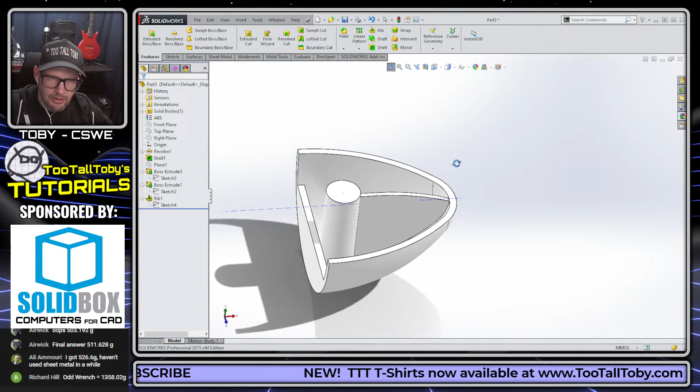And then we've got one final rib here, which is also 30 over. So I might take the right plane, hold control, and drag the right plane over here until I get to this point, which is that same 30 millimeters, and just drop it right on there. Or, if I really wanted to do this correctly per the design intent, I might do, let's see here, view this sketch, single click the right plane, hold control and drag, single click this point. So now I've got a plane that's exactly at the center of that boss. Then hold control and drag that plane, let go, and type in the distance 30, enter, enter.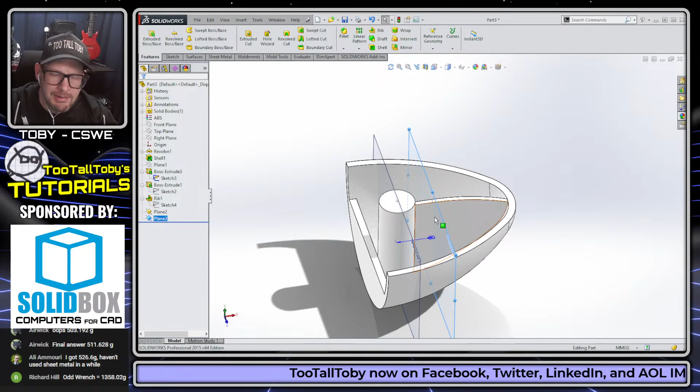Now I have a plane over here that has a driving dimension of 30 relative to this plane, which is going right through the center of that boss. This all depends on how well you know the customer and how you can anticipate changes to the model downstream, and how important it is to do that extra plane there. But if you know the customer and the product line, there certainly could be justification to do that. So it's good to know how to do it.

So now this is going to be another rib. It's going to be very similar to that first rib. In fact, it's going to start out at that same height, right here. It's going to come over with a flat of 50, and then come down here like so, with a radius of 60. So this distance is going to be from the origin to this point, or the middle of the model to this point, at 25, to give us that 50 flat.

And then we can do the same trick we did before. We can make a vertical line here and say that we want that vertical line endpoint to be pierced to this top edge of the model. That should leave us with just a little bit of the rib sketch sticking into the model as it passes through a curve in 3D space.

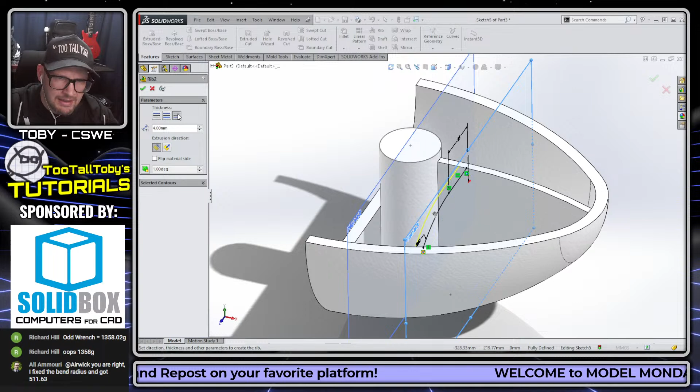So we go features, rib, and that rib is going to be offset to one side this time. So offset that rib there to one side, and that's going to be at 4 as well, I believe. Did I not add a dimension to that one? Missed a dimension on this thing, huh? That's not good. Make that 4 as well. And then we are going to hit the green check mark.

See here, existing rib does not intersect the model. Okay, the direction of the material is incorrect. So I click on that little arrow there, hit the green check mark. There we go. Now it's just a matter of taking that rib, hold control, pick the centered plane, go to mirror, to mirror that rib.

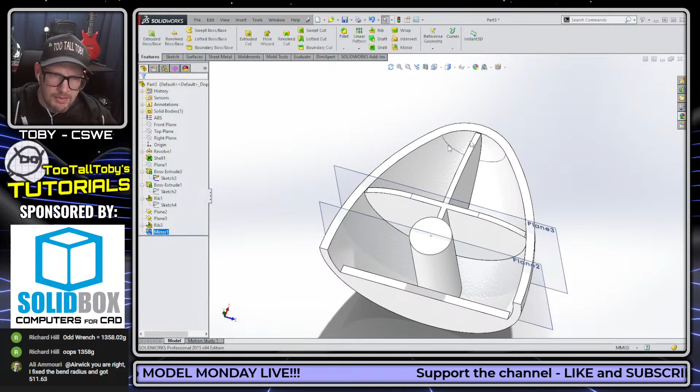And then we'll finish off here by doing a hole wizard hole for the counter bore that is... Oh, actually, this is kind of a weird one too. This is a counter bore, but it's counter bored from the bottom. So you can see here the counter bore comes down, then comes out, then comes down. In a spot like this, I might consider just doing it as a cut revolve. There's a few different ways we could do this one, but maybe if you're just getting started in 3D CAD, following this as a tutorial, it might be good to know how to do this as a cut revolve.

So I would wake up the center here, come across, come down, come out, come down, come over, come up. Finish that off. I would say, you know, I probably want a center line here because that'll let me create these nice doubled dimensions. So when I click a dimension to that center line and come across, that gives me that nice doubled dimension. That's going to be at a diameter of...

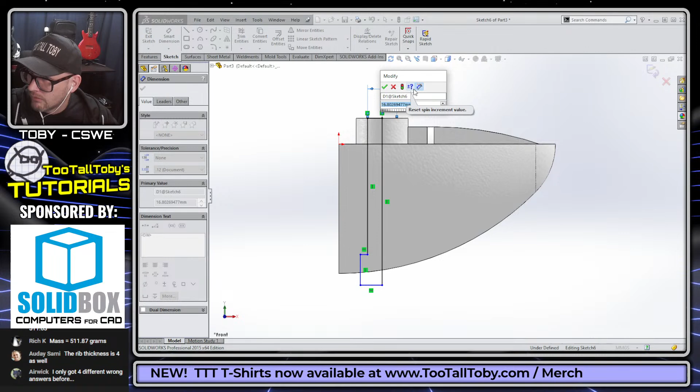Let's see here, where is that hole called out? Here we go, 12 for the through. And then I can just single click on this line down here and it automatically gives me the doubled dimension as a subsequent dimension. So I'll make that 18. And then this is going to have a depth here of 75 from the top to this point here.

And then for this dimension down here at the very bottom, certainly we could line it up here. A lot of times what I'll do is I'll just put kind of a do-nothing dimension on here. I'll make this 100, and then I'll right mouse button on that and say mark for drawing is unchecked. And then I would say this is do nothing. What that mark for drawing unchecked does is it turns it purple, and when I go to make a drawing and import my dimensions, it doesn't automatically bring in that dimension. It knows to ignore that dimension in the drawing.

So features, revolve cut. There we go. Hit the green check mark. Okay, and we do what's called the final spin. We spin this thing around. We give it one final look over. It all looks pretty good.

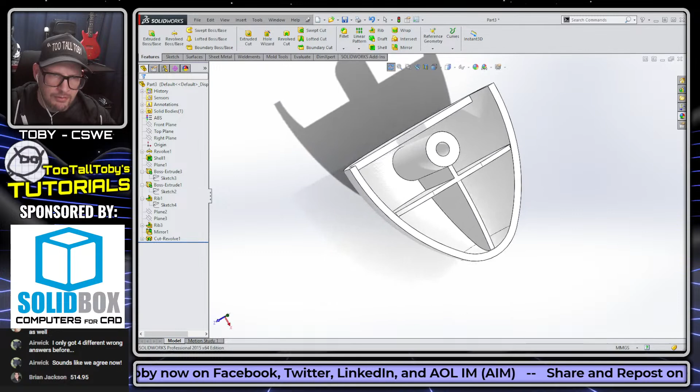And so now we go to our evaluate mass properties, and 251.0 for my mass on this part. Let's see if we got it right. Let's see here. Oh yeah, 251 plus or minus 1 gram. We did it. We got it right.

And so with that, let's get into it here, our final answers of the night. We've got our answer to challenge number 1. If you guys remember, challenge number 1 was the odd wrench. So we had a number of people coming in here and answering this. I think, let's see here, what do we get for some of these answers?

We got Rich K coming in at 1361, revising to 1358. Rich K sticking it, or Ali coming in at 1358. Rich K revising to 1358. We got, let's see here, Rob N coming in at 1358. Nicely done, Rob. We got, let's see here, TJ coming in at 1362. Nice job, TJ.

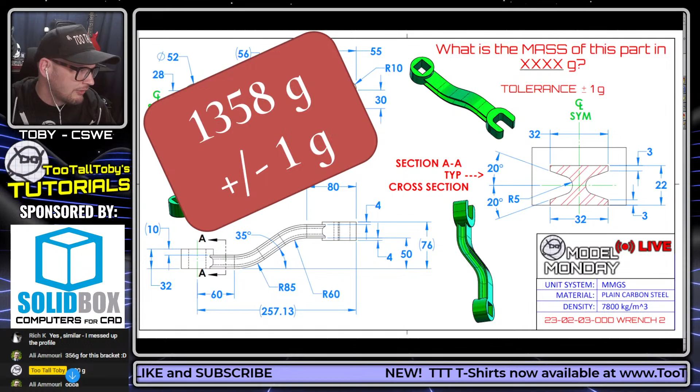And we got Richard Hill coming in 1358. Very nice, let's see what the answer was. 1358 plus or minus 1 gram. Very nicely done. I think that one goes to Ali, who got the first correct answer, just barely edging out Rich K. Ali got in there with 1358, the correct answer. Very nicely done, Ali.

Let's see here, hold on. I can't see my chat. Move this down, move this up. Okay, cool, very nicely done.

And then for our second model, our sheet metal challenge. GG to Ali for that first one. So for our sheet metal challenge, let's see what we got here. Airwick coming in at 543, revising to 503, then 511. Ali coming in at 526. Ali coming in 511. Rich K coming in 511.

This is interesting, I think I must have had a typo here because I thought this was out to 4 places for this one. 6mm wall thickness, 1060 alloy. Hope I didn't make it out of plain carbon or something. Messed myself up. Let's see here.

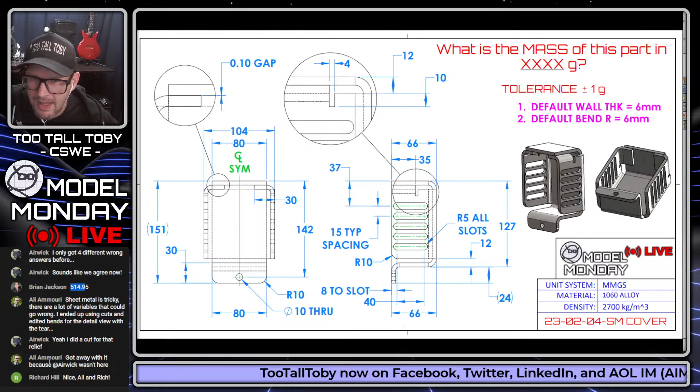Brian coming in at 514, nicely done Brian. And what answer do I have on here? 1478, that can't be right. Hold on, we got to take this one to the review. Let's see what we got here. We're going to the review. It is plain carbon, dope. There we go, we're going to the review.

511.6, so we call that one 512, 511, 513. 511.6, so 512, 511, 513 are all correct answers.

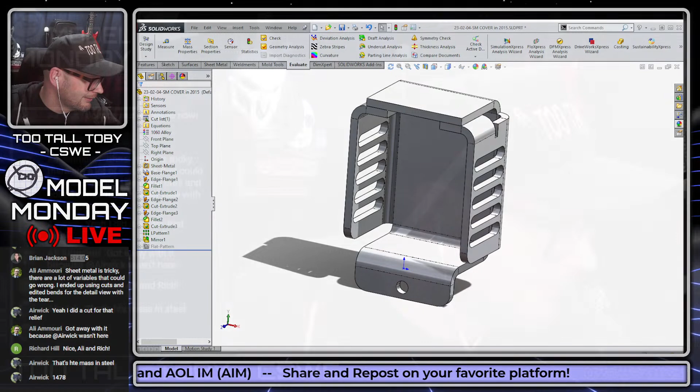Let's make an adjustment here guys, adjustment on the fly. Brian, I know this is your first night, I promise you it's usually not quite this all over the place. Man, you could tell I was bouncing between the plain carbon and the 1060 aluminum.

All right, here we go. The correct answer is 512 plus or minus 1 gram. Very nicely done to everyone in the chat. Airwick came in with 643, then 543, then 503, final answer 511.6. Ali coming in 526, revising to 511.6. Rich K coming in 511.8, very nicely done. Brian Jackson 514.9, very close. And Airwick 1478, that must be what it was in plain carbon. All right, I'm glad we got that one figured out. 512 is the correct answer, or 511.6 really is the correct answer.

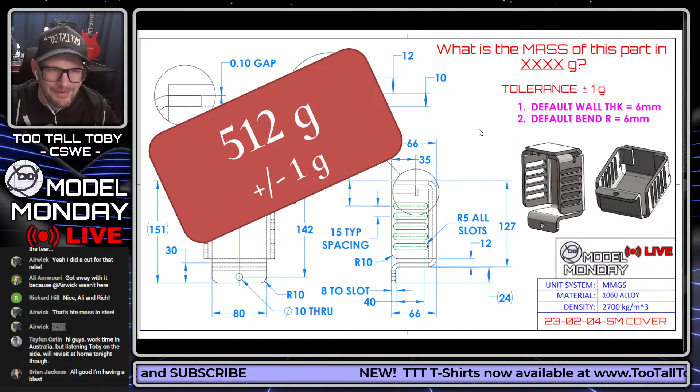Looks like our winner from that round is going to be Airwick coming in at 511.6. Very nicely done. Our winner from the first round was Ali. Very nicely done, GG to Ali, GG to Airwick. Very nicely done to everyone, GG to everyone really.

Time to get some sleep, it's 3:18. Ali, thank you so much for staying with us tonight and joining us. Thank you all so much to everyone in the chat.